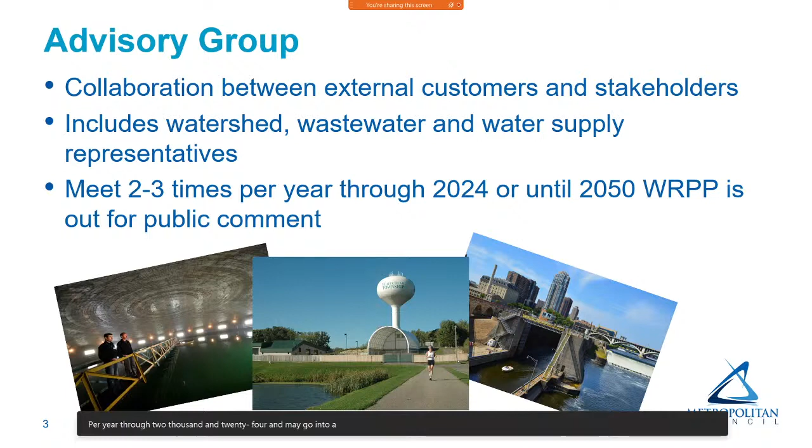And also we would look to have representatives from watershed districts as well as the watershed management organizations throughout the region. It is planned that this group will meet 2 to 3 times per year through 2024. It may go into a little bit into 2025, depending on when the public comment period ends for that. So next slide, please.

Really, the purpose of this group is to advise the council staff on the proposed process, timing, and schedule for updating the policy plan, to advise and assist council staff in making connections with groups that need to be reached out to and receive input from. So, giving us advice on other people that we should be talking to. They will provide input on the emerging water issues to consider as we begin the process, provide input on new policy and implementation strategies we'll be working on throughout the entire process, and really just be an additional way to help define the process for seeking input on the draft issues and policies before we seek input from our larger group of stakeholders.

Next slide, please. This slide includes the proposed advisory group members. From this slide, you can see that we have watershed management organizations as well as watershed district representatives. It includes rural watersheds, larger watershed districts, as well as some of our smaller watershed organizations. It includes staff from communities throughout the region, representatives from developing communities, the urban core, as well as rural centers.

I would like to point out that as of up until today, Stephanie Johnson was going to represent Minneapolis. She is now leaving her position, so we are working with Brian Dodd, who is the Public Works Director for Minneapolis, to come up with a replacement for her.

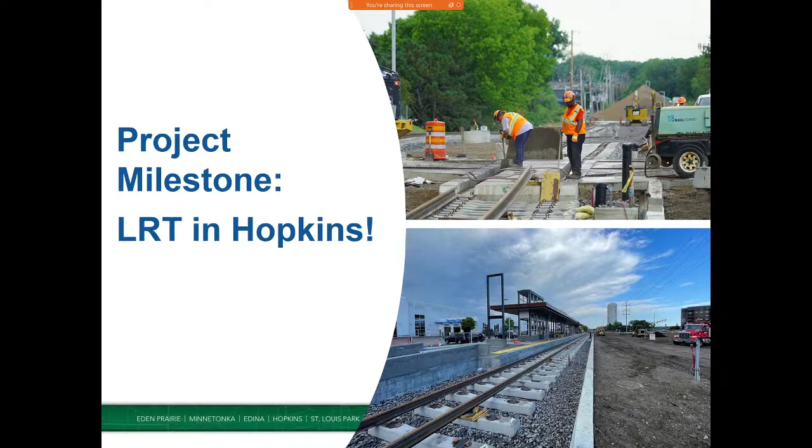So, major milestone in our mind - we actually have some LRT track down in place between 11th and the downtown Hopkins station, and that's a good sign. More to come, primarily in the western part of the project. A lot of bridge work to be done. I have another image showing one of the bridges where track work is starting to take place.

Maybe on this slide I might defer to you if you have any comments on the event last month. I hadn't seen this picture - I was teasing Jim Alexander that the last picture showed everybody wearing masks, but me not wearing a mask, so I was a little concerned about that. But it's nice to see Administrator Nuria Fernandez standing with me and Jim in the background. That was really an amazing tour - not just the field hearing, but sensing her enthusiasm and regional director Kelley Brookins, who was there along with the senator. This was at the Royalston stop in the city of Minneapolis. We keep thinking of the Kenilworth Trails in Minneapolis, but there's really an important area there creating a gateway to the Root District.

For those who don't know, and I didn't know until really studying the Southwest corridor, the area around the farmers market, which was a city of Minneapolis traffic department back industrial area, is really opening up to be a place for BIPOC entrepreneurship, affordable housing, artists, workshops, and food with the farmers market. It's right there close to the urban core, with tremendous economic opportunity, and I think it's being opened up in part because of this project.

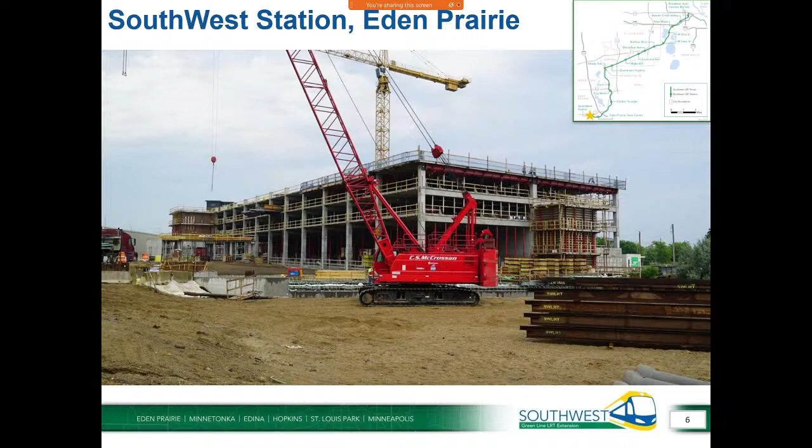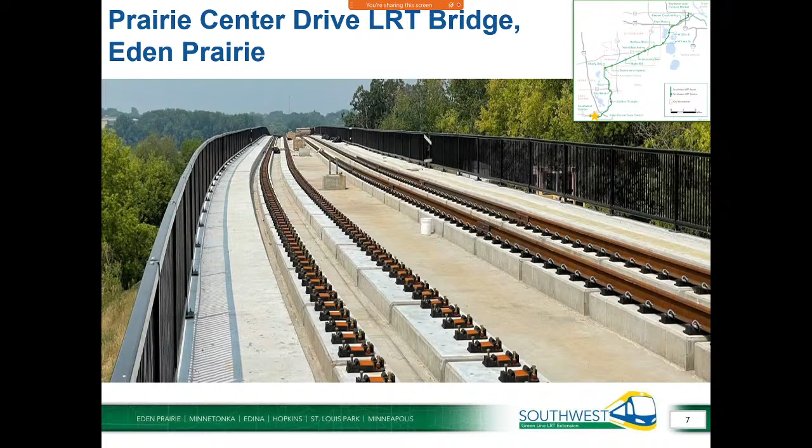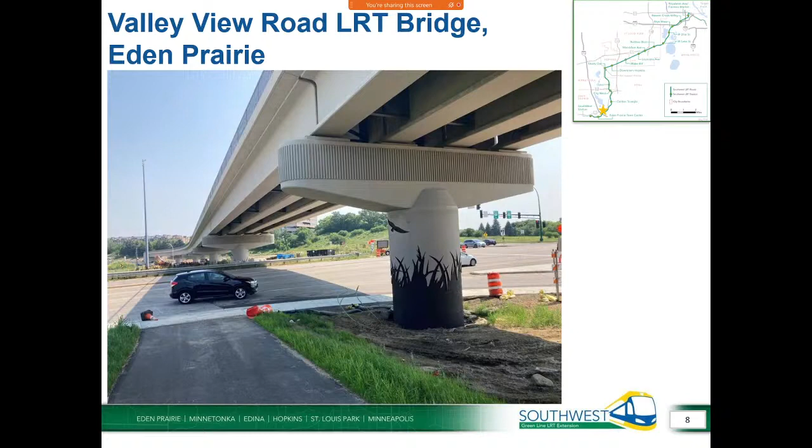Next slide, please. Here's some artwork that was actually paid for by the city of Eden Prairie - looks pretty nice. This Valley View Road LRT bridge is well far along; the structure is nearly complete, about 98% done, and you can see the artwork exhibited on the pier.

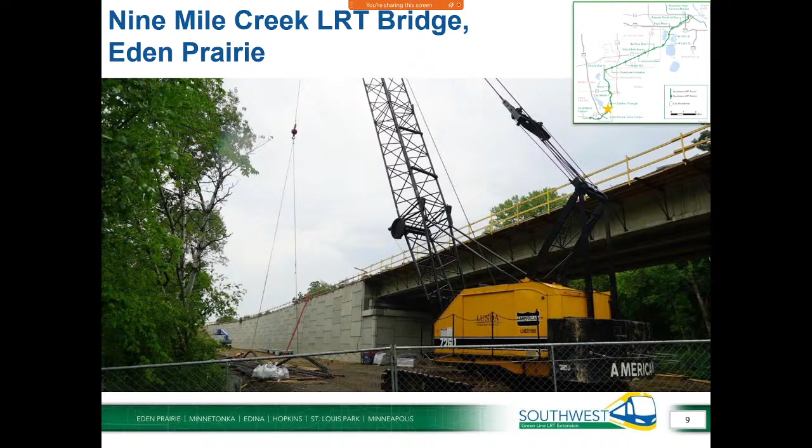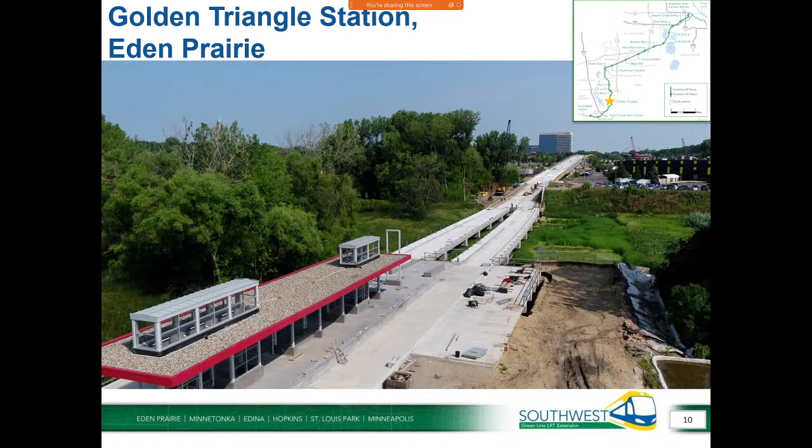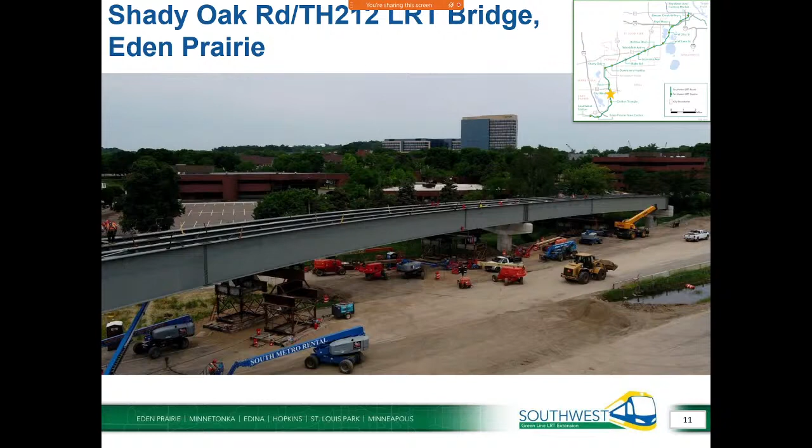It was kind of interesting to watch the contractor do that work with the two cranes and a lot of workers involved. A lot of coordination.

Next slide, please. Make our way into the 62 tunnel. We're just about complete with the structure here. This is the south part of that, and you see the retaining walls going into the portal there with 62 off in the distance. We'll eventually be bringing 62 back towards us in the slide for its permanent location, looking to do that later this fall. The contractor will continue working on the tunnel work itself with backfill and all that kind of good stuff.

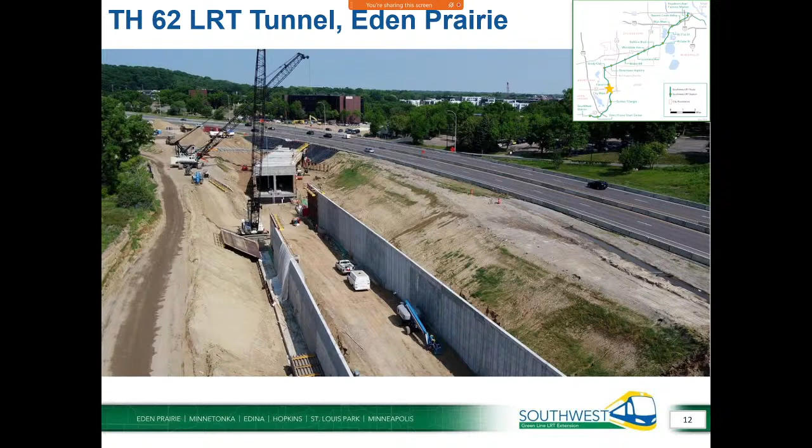Next slide, please. So we make our way past the Opus area, and then just north of the Opus area is our Smetana and Feltl Road bridges. What you see in the lower left is the Smetana Road bridge. The LRT essentially goes down under that bridge. You can see where the crane is - that's where the LRT will be traveling through.

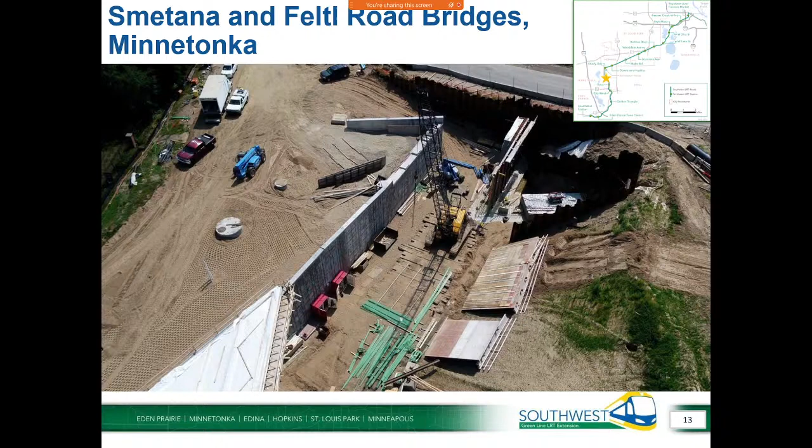Next slide, please. So this is actually our longest bridge on the project. Most of the piers are done for the Minnetonka Hopkins Bridge. This is just north of that roadway bridge area I just spoke of with the freight rail, kind of mid-slide there. The contractor has started placing some decking, or some bridge beams, on this bridge.

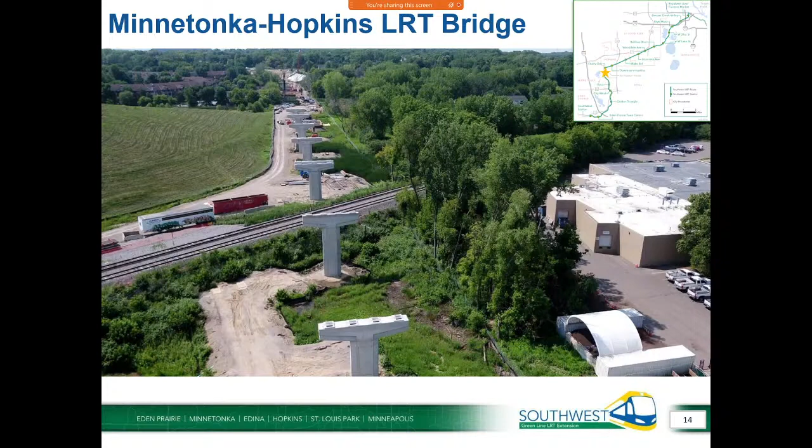Next slide, please. Shady Oak station continues to progress with more elevation work there and some of the knee walls in place.

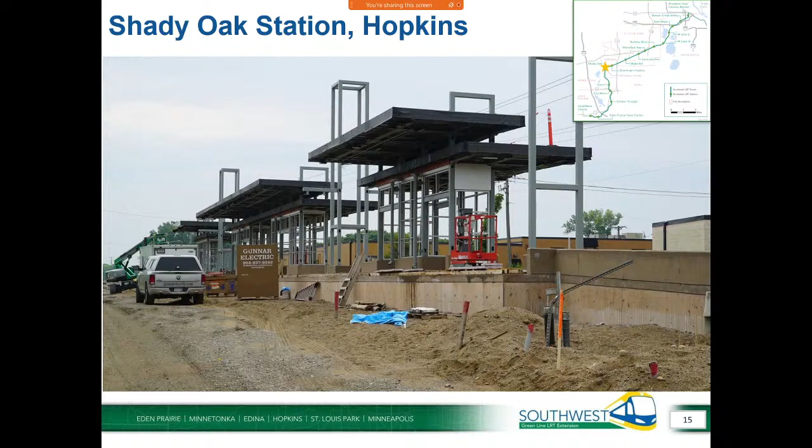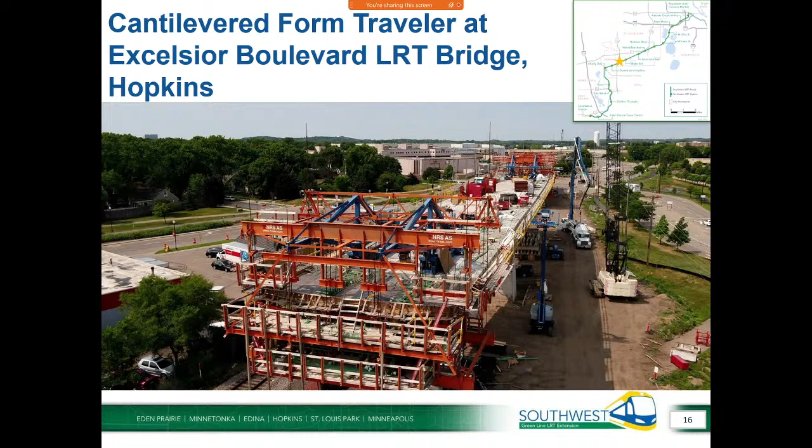Next slide, please. This is the Excelsior LRT bridge. Quite a structure - if you haven't been out there to see this, or if you have, you can't really miss it. It's a pretty big structure. It goes over, I think we have about a 400-foot span that spans over the roadway and the rail tracks just in at the east end of Hopkins there.

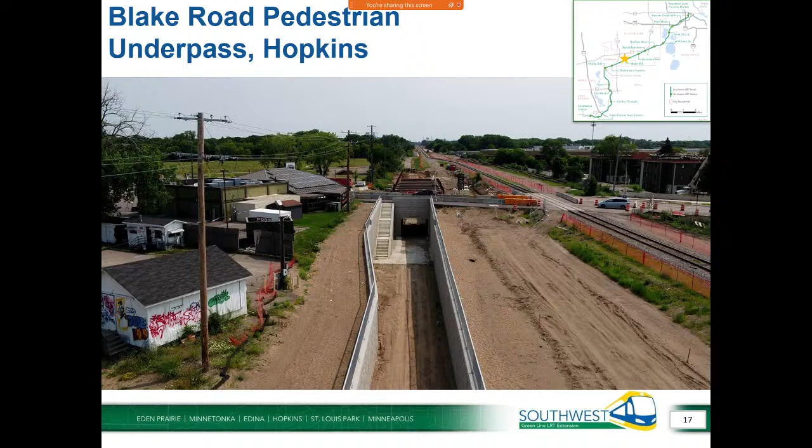Next slide, please. Blake Road pedestrian underpass bridge. You can see off in the distance the contractor is working on that east section of the pedestrian tunnel. That needs to be done first before they can move the freight in. The final location will be just to the right of the pedestrian trail, and the LRT will be essentially where the freight tracks are located in this image. So that's really the last freight rail shifting that we have to do, other than what we have to do with the Kenilworth tunnel once that is completed.

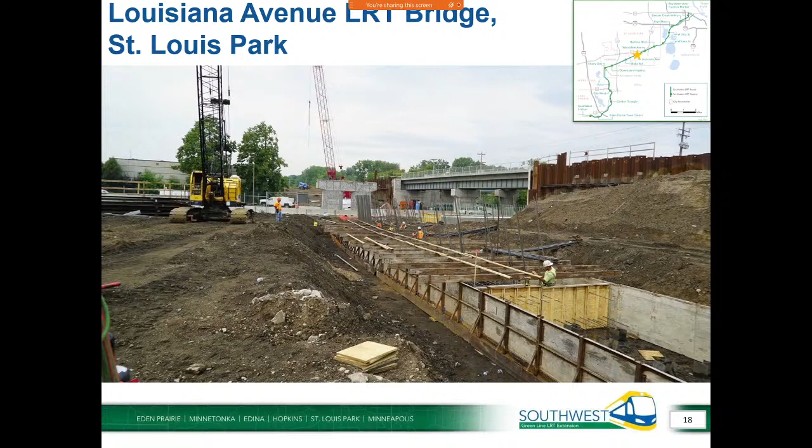Next slide, please. Louisiana Avenue LRT bridge - this is just on the east side of the roadway in St. Louis Park. You can see off in the distance the freight bridge has been put in place and in use, and the contractor is building this LRT bridge. Very soft soils, so we have a lot of piles involved on this structure here. This is the east abutment for that bridge.

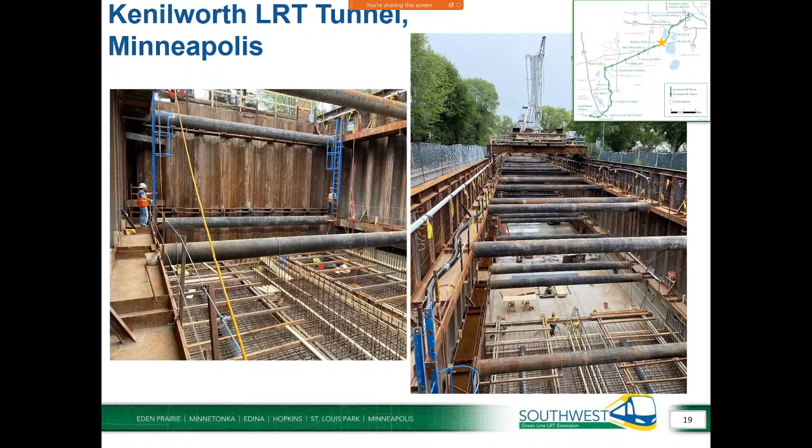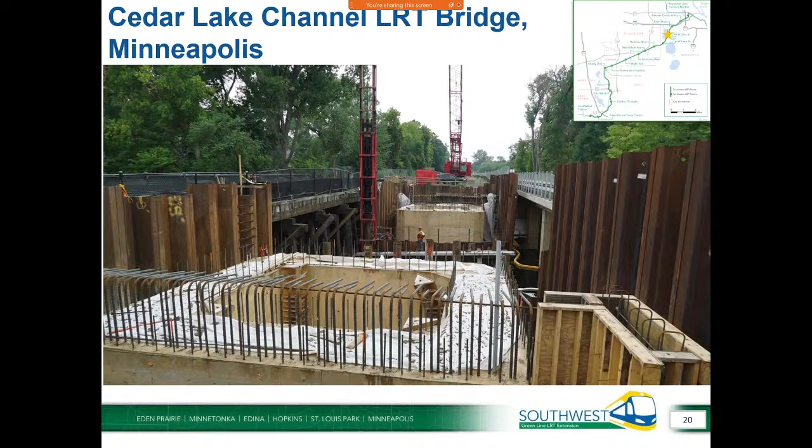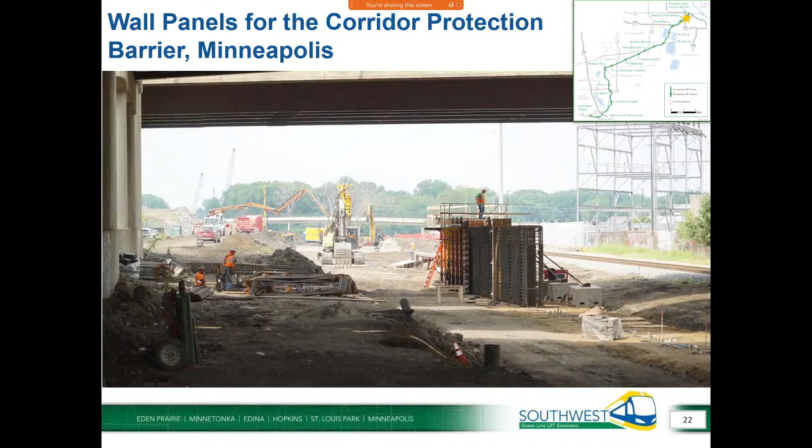So the other issue we've been talking about is the corridor protection along the BNSF corridor in the eastern part of the project. This is just under I-94 where the contractor is starting to place some of the walls for that corridor protection. The contractor has mostly been focusing on putting in a lot of drilled shafts. We have a lot of drilled shafts at this location that need to get installed, but this work is now moving along pretty well.

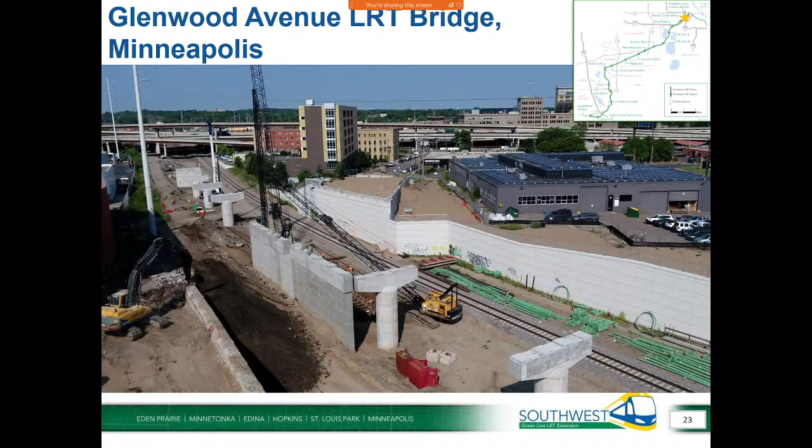Next slide, please. Up in the Glenwood area, as you see toward the center of the page, that's the west abutment for the Glenwood Avenue Bridge that will eventually be built. In the center, or just to the left, is our LRT bridge, with the piers coming up and eventually taking LRT out of the freight rail corridor. The contractor is currently working on the east abutment for that bridge on the east side. So eventually, once we're all said and done, we'll have three bridges: two roadway bridges, one on the east, one on the west side, and in the middle will be the LRT bridge, so the trains will cross at that roadway grade.

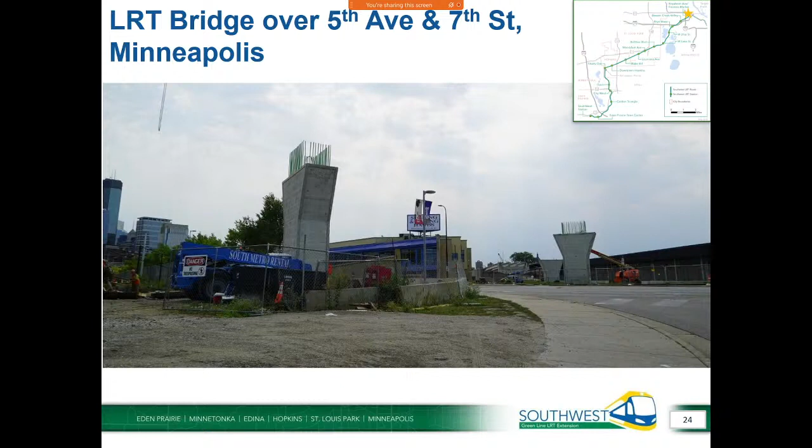Next slide, please. I think this is the last of the civil work. This is close to our Heywood facility where the contractor has been building the piers for our final bridge that connects us to the existing blue-green line at Target Field Station.

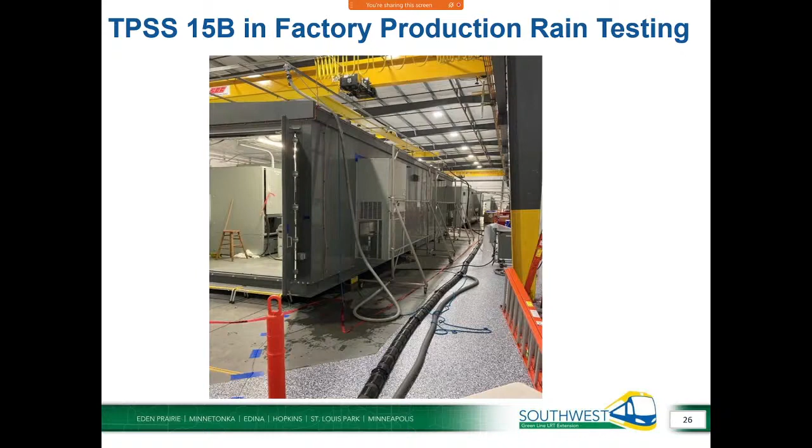So on the systems contract work, we're starting to get underway with actually getting things in hand. This is the first really out of the gate, the traction power substation 15B. This is going to go, or actually has been placed, out at Franklin.

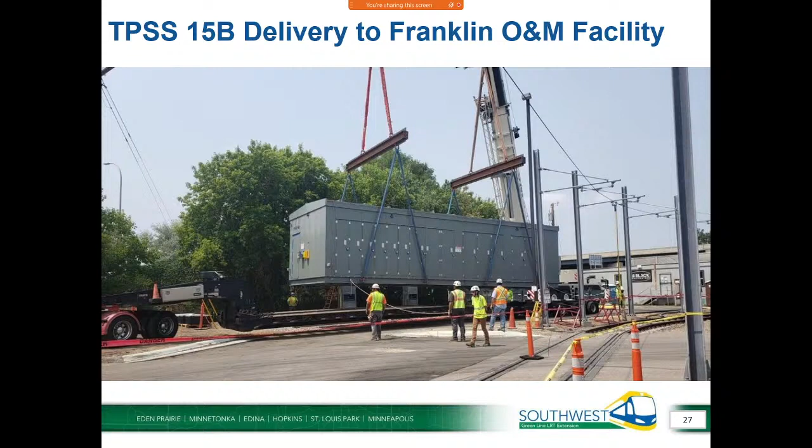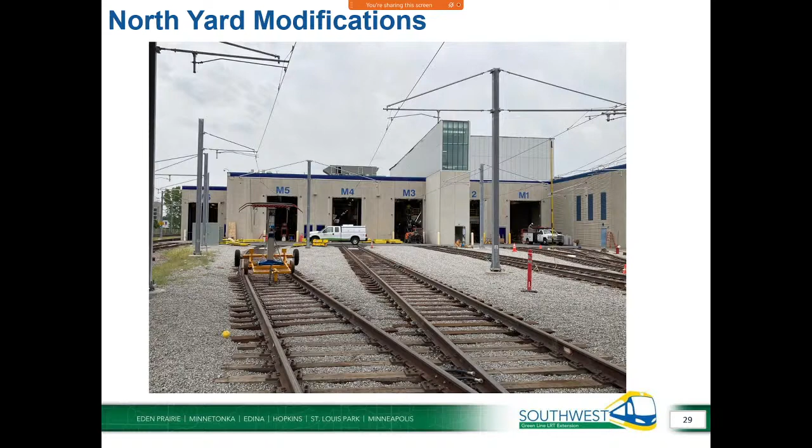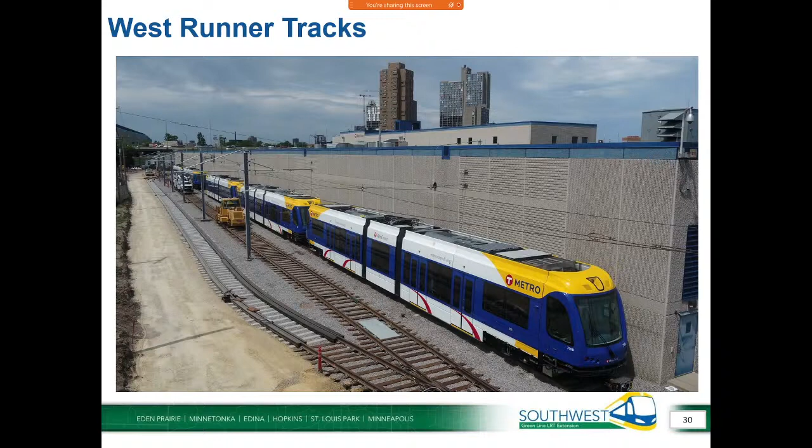I have a question. Sure, yeah, thanks for that update, Jim. I'm just curious about how all of the construction along the Southwest Corridor is affecting nearby residents and traffic.

Yes, Mr. Chair, council members. Well, maybe I'll start out at West. We've really had some challenges out in Eden Prairie because we've had to close a lot of roadways and ramps, and we've had to shift traffic around on Flying Cloud, for example. We do our best to get that information out, working with the city of Eden Prairie in this case, and also the county and MnDOT because they are impacted. We just really try to get the message out.

I guess maybe currently the hot spots are Excelsior Boulevard, which has been a challenge because we have the westbound lanes of Excelsior closed, and that's been going on for quite some time. That's where the bridge is going to ultimately go over that roadway. We do hope to have that roadway open later this fall, but that has been causing some challenges for local folks in terms of how they get around. We also have Blake Road closed going southbound as well, so that just further compounds that issue. Trying to think what other areas...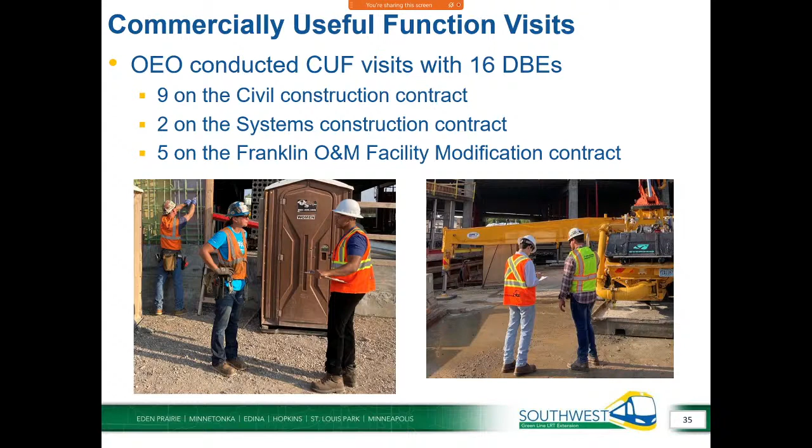I do want to share that there has been some change orders issued for these construction contracts, and the prime contractors have been working to ensure that the DBE participation continues to exceed the goal as much as possible, and they're trying to share these opportunities with the DBEs by increasing their contracts or else bringing on new DBEs, and I'll share more about that later.

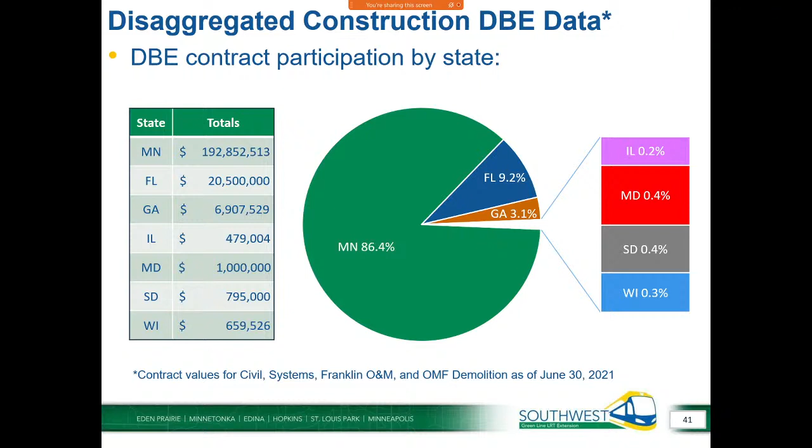Thanks for the comment. Any other questions at this point? All right, John, keep going.